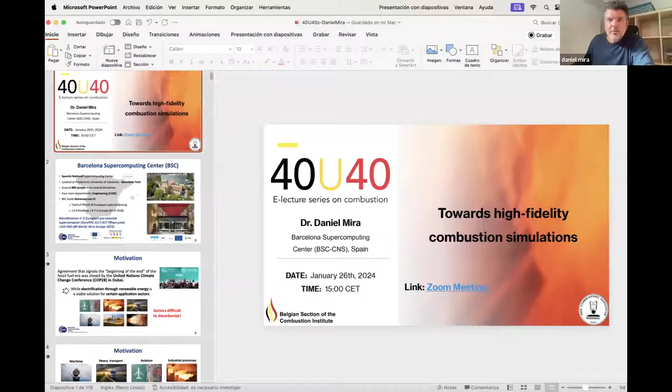As Alessandro said, I work at the Barcelona Supercomputing Center. We are located in the city of Barcelona in the northeast of Spain, and our institution hosts the supercomputer MareNostrum, which is one of the largest supercomputing facilities in Europe. Currently, we are moving from our current system, MareNostrum 4, to the new pre-exascale system, MareNostrum 5, one of three pre-exascale facilities that Europe has invested in to support science and innovation. This means our research activities are very much aligned with the simulation of combustion systems, trying to keep pace with the development of hardware architectures. So on our side, models, methods, and software are coupled together to take benefit of the current generation of supercomputers.

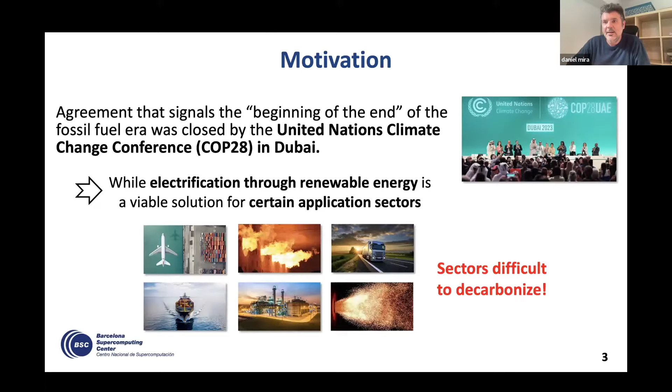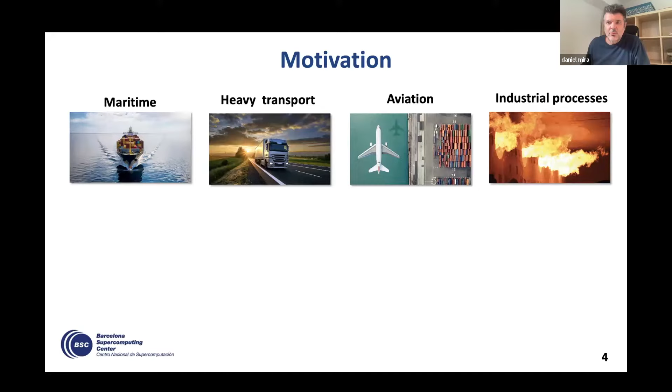If we look at these sectors more closely, we can see that in order to make them more efficient and carbon-free, we have really two main directions. The first one is to improve current combustion technologies. As you can see, engines and burners have been optimized and improved over the years. This has been demonstrated in our community, in conferences, and also by the things we can buy in shops. This requires a substantial effort, and indeed this is a direction we should take to improve our current systems. But even with radical new technologies, we can have big jumps towards reduction of emissions or fuel consumption.

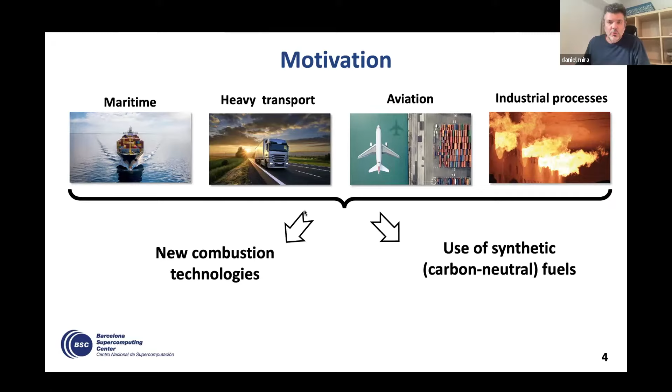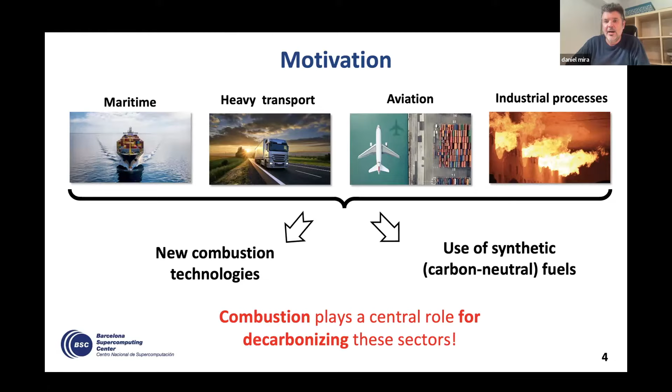But the impact is more on the long term. If we want to have impact in the short term, one alternative that is becoming quite relevant is to change the fuels. So we can retain the current combustion system, the combustion technology, but we replace the fossil fuels by alternative fuels that can be carbon neutral or not contain carbon at all, like hydrogen. With this, we are able to have a direct impact in these sectors in much shorter time. So in both strategies, combustion is at the central role, and it is the direction required for decarbonization. But if we want to understand and predict combustion, this is not an easy task, as you already might know.

So if you look at, for example, some of the pictures on the left, like some flames in furnaces, a hydrogen flame in an aeronautical combustor, or another flame of an oxy-fuel burner or a gas turbine burner, as you can see, when we go to applications closer to industrial applications, the characteristics of the flames and burners become quite complex.

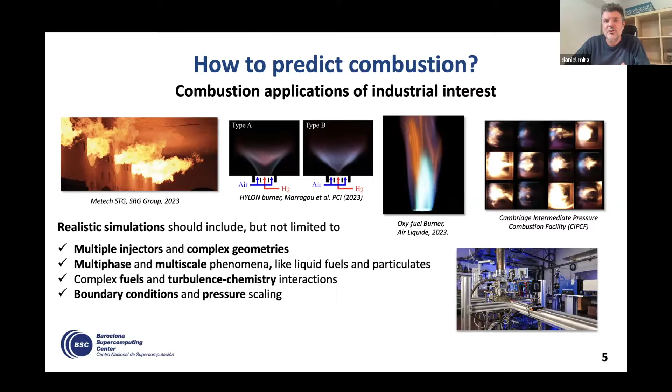Some of the aspects bringing this complexity are related to the existence of multiple injectors, complex geometries, interactions between these injectors and the walls and the environment of the system. Also, because the combustion process itself is very complex, multi-phase, multi-scale, you need a description of the possible interactions that appear in all these physical phenomena.

For all these reasons, we can ask ourselves if we are able to actually perform simulations of real systems, and if we can, how expensive these simulations are going to be.

If we think about the combustion process itself, we see that combustion is a complex process that requires the injection of fuel. In case of liquid fuels, you have to inject at high pressure. Then the fuel is injected in the chamber, then it requires atomization, so the liquid core of the fuel needs to be broken into ligaments. These ligaments need to form droplets. The droplets then evaporate, they mix with the air, and eventually combustion happens.

So you need to account for all the physics associated with all these processes, and then the problem becomes quite complex, because you have, for example, pollutants that are developed at certain scales. Then you have the heat release that is usually faster than the formation of certain pollutants. Then you need to account for turbulent chemistry interactions.

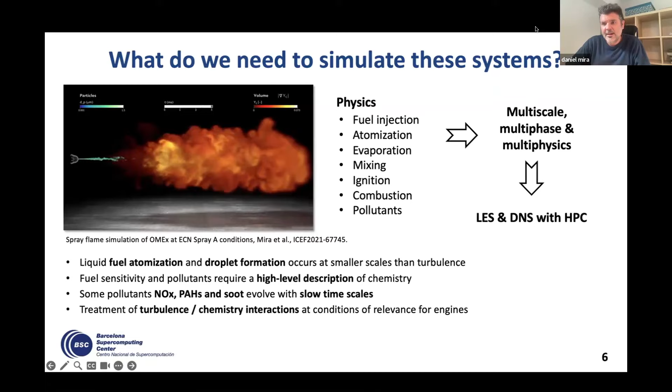So at the end, we can say that combustion is a multi-scale and a multi-physics process, and therefore it requires advanced computational techniques in order to have proper characterizations of these systems with high fidelity.

And if you require complex simulations, this usually comes with the use of high-performance computing that allows you to perform simulations in a feasible amount of time.

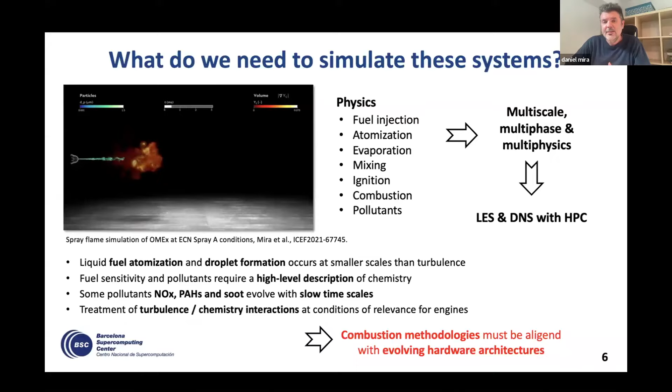With these ideas in mind, it is important to understand that combustion methodologies should be developed aligned with the supercomputing and hardware architecture, so we can take advantage of the evolution of these systems and the computational power that they bring for our community.

So if we are trying to understand how we can perform these simulations or how our methodologies should be based, at the end, it's really a matter of scales. If we think about spatial scales, for example, these are just some numbers that will give you some estimates.

For example, we need to deal with systems that have a fuel injector with dimensions in the order of millimeters, when the combustion chamber is in the order of centimeters to meters. The length of the combustion chambers could be very long, in the order of meters.

But then we also have aspects related to the flow scales, like the flame thickness or the integral length scale, that are associated with very small scales. So we need to deal with small scales that occur in very large volumes, which at the end introduces some complexities and requirements of computational cost.

If we do a similar analysis about the temporal scales, at the end, it's about the same. We need to, if we are interested in the acoustics, be able to recover and describe the time scales required for the acoustics, which could be larger than, for example, the formation of radicals and also emissions.

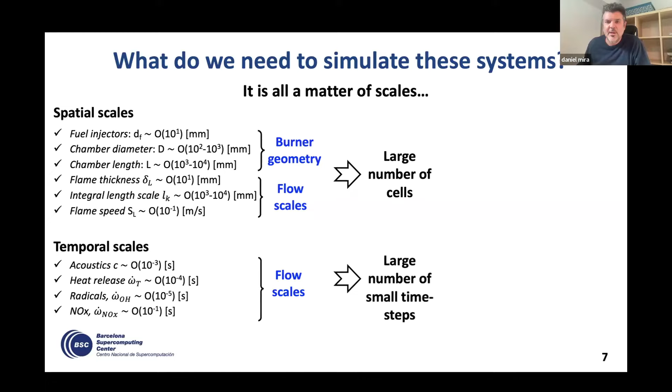So if we think about the requirements of the spatial scales, we are going to end up having a lot of cells in our computational domain, because we need to predict the distribution of the species and all these processes in these big computational domains. But considering the scales of the problem we're solving, we're going to require a large number of small time steps if we want to solve all the processes in, let's say, an explicit manner.

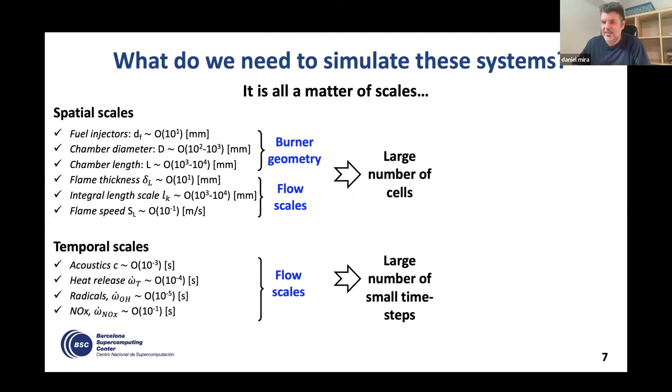So at the end, if we think about real problems, we can assume that doing DNS can be prohibitive, and these problems are more suitable to use RANS. Now the question is, with this increase in computing power and computational capabilities, is it possible to push LES towards this type of application? And indeed, if we want to go in this direction, we need high-performance computing, but this is not going to be enough.

We need models. So if we go to LES, we need computational power, but also we need some models. With this motivation, I want to give you a little bit of orders of magnitude about how costly these simulations can be.

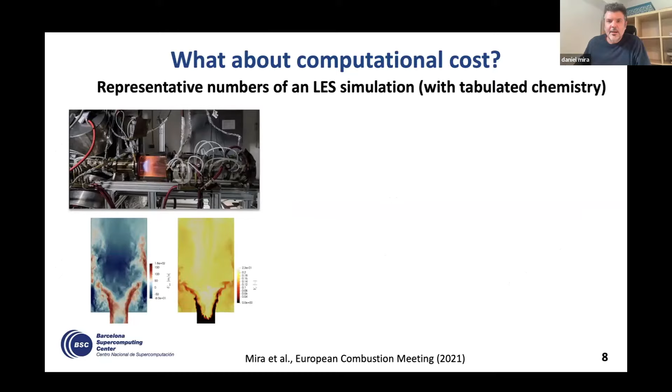For example, if we take one of the simulations we conducted about a hydrogen combustor that was experimentally characterized at the Technical University of Berlin, for this flow condition we perform an LES of hydrogen-air at atmospheric conditions. For a simulation of 30 milliseconds, considering 250 million cells, we require in the order of 100 hours using 6,400 CPUs.

If we want to do a simulation overnight, like I work in my office today, prepare my model, submit my simulation before I go home, and I'd like tomorrow morning when I get back to the office to look at the results, I would require in the order of 60,000 CPUs to get the same result. 60,000 CPUs is something currently available in supercomputers - they even have more cores than that.

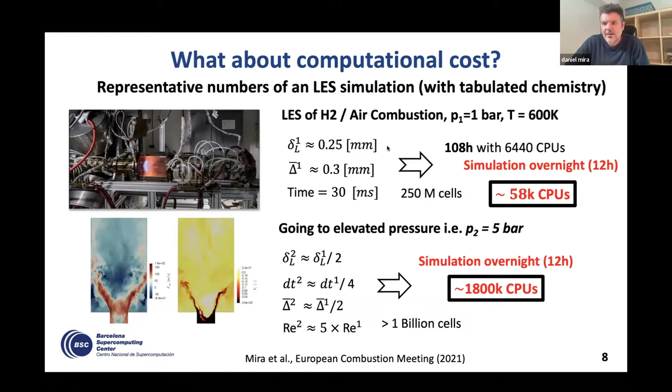But if we want something more realistic, just an increment in pressure in the order of 5 bars - a factor of 5 in pressure - then for a similar simulation we could roughly estimate it would require in the order of 1 billion cells, and in the order of 2 million CPUs, which is definitely not available in current supercomputers across the world.

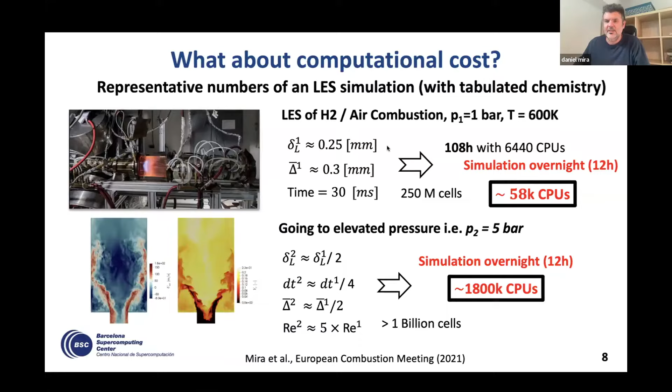So now the question is how we can make our simulations more efficient, or how we can improve the software we develop, so we can try to reduce the cost associated with this simulation. Let's try to talk a little bit about this.

If we want to understand how expensive numerical simulations are, this is really a very complex task, because it depends on many things. The first is whether you are going to use RANS, LES, or DNS - depending on the technique you use to solve the fluid problems, the cost changes. It also depends on the discretization strategy you use - finite difference, finite volume, high order methods, for example. It also depends on the turbulent combustion model you want to use for solving your problem, if you have a model. If you don't have a model, of course, it's going to be even more expensive.

Then there are other aspects that are usually less discussed or less considered, which is about the algorithms and the parallelization in your code in order to solve the problem. If your code is serial, of course you are going to take a certain time, but if your code is parallel, and you can double the resources used to compute the simulation, then the cost of the simulation will be reduced by half, or at least the time to solution will be reduced by half.

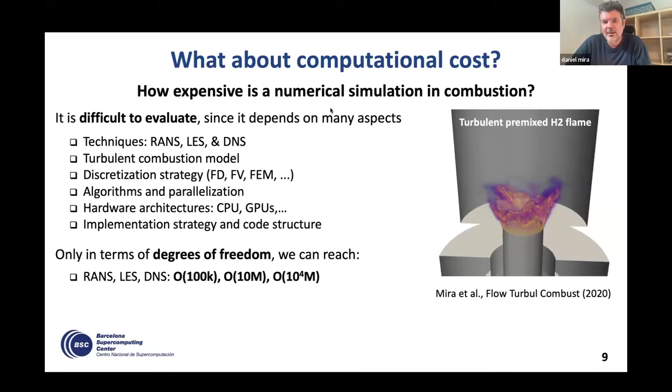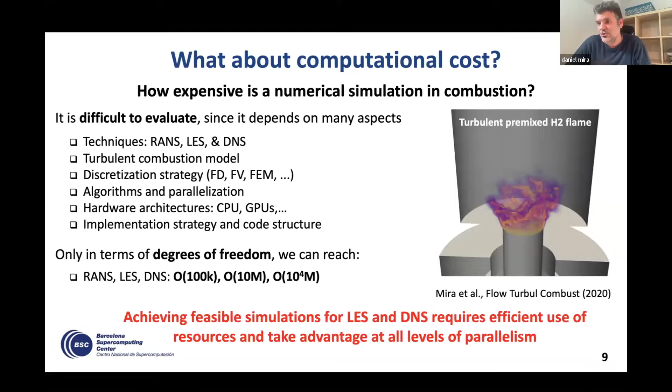Just to consider, in terms of degrees of freedom, when we go from RANS, LES, and DNS, what you can see is that the jump from RANS to LES is a very big jump, not only in terms of degrees of freedom, but also in terms of the computing requirement for an unsteady simulation. There is also a big jump when you go from LES to DNS. For all these reasons, if you need to conduct LES or DNS simulations, it is very important that your code makes efficient use of the resources available in the supercomputer.

So if we try to understand where this cost is coming from, because I've been saying a lot of things about physics, about computational requirements - where is it really that these combustion simulations are so expensive? Where does the problem really come from?

So if we think about the conservation equations that we need to describe the flow or the problem under consideration, then we have to solve the equation for continuity, momentum, chemical species, and energy, and the system is closed by the equation of state. So at the end, more or less, you end up solving these equations that doesn't seem to be very problematic, but they become very, very problematic.

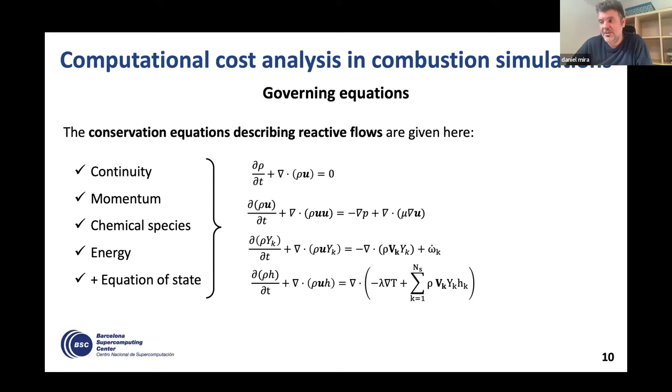And not only the Navier-Stokes are problematic, but also the equations related to the chemistry and combustion. In particular, for combustion simulations, the equation for the conservation of a species is usually the most demanding part, mainly for two main reasons. The first one is because, depending on the fuel and depending on the detail of the chemistry that you need for your problem, you might end up solving a very large number of transport equations.

So, for example, if to describe the fuel oxidation you need 20 species, you will need to transport 20 equations that will go on top of momentum, continuity, and energy.

And the other aspect that is important is that this equation for chemical species has a source term which is non-linear, and depending on the characteristics of the oxidation process, these chemical source terms can be very stiff, and it could require very demanding or very costly calculations.

So let's try to look at this equation more closely. This is very fundamental, but I would like to just revise it. So this equation at the end is composed of 4 terms.

So we have the temporal term that is related to the time marching of the simulation. So, how is the concentration, or in this case the mass fraction of a species K, evolving in time. Then we have another term that is related to advection, how this species is moving with the flow.

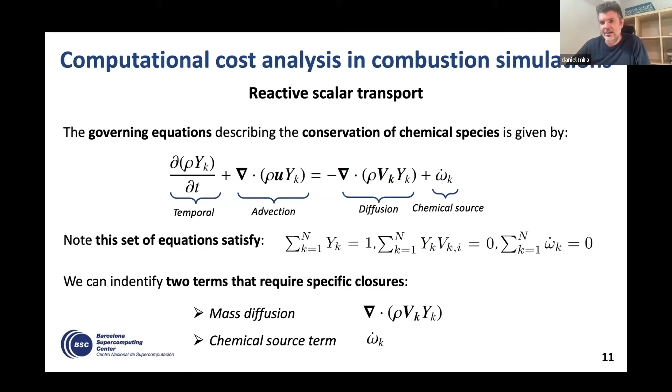And of course, the chemical source term, as I already introduced, can be stiff, and you might require to use ordinary differential equation solvers for this.

So considering this equation, we can try to understand where the cost is coming from, and what are the aspects that can introduce a penalty in the calculation. The first one is what we call the assembly of the partial differential equation. The assembly means basically the computation of the different terms: the advection, the diffusion, and the source term.

So at the end, the number of degrees of freedom that you are going to have in your problem is the number of species that you have in your reaction mechanism times the number of cells that you have in your computational domain. So for each of these degrees of freedom, you will have to evaluate convection, diffusion, and source term.

The other element that introduces cost and complexity in the calculation is the chemical source terms, as we already said. If it's stiff, this could require some iterations and some complex algorithms to extract the values. If it's non-stiff, then you can get away with more simple, explicit or semi-explicit methods.

And finally, something that is also less discussed in the literature is what we call the load imbalance. Let me explain a little bit about this, because this can become quite problematic in combustion simulations. For instance, if you have a computational domain like the one described here, these small cells are trying to represent the cells of the simulation, and these dashed lines are representing the subdomains. Then you can assume that you will have an MPI thread that will solve the problem in each of these subdomains.

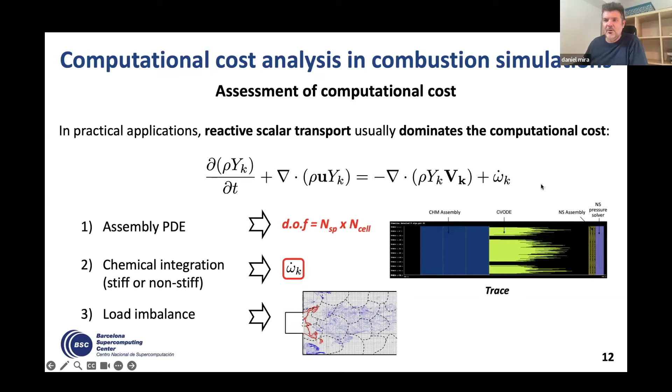So as you can see, the computation could have finished somewhere here in the middle, but because there are some MPIs performing work, we need to wait for them to continue. This can be a very problematic issue, especially in combustion when the chemical source term is very stiff.

So another problem associated with the chemical source term - it's a troublemaker in combustion, in fact. It not only brings a cost, but it means that when we want to go to LES and filter this equation in space, the problem becomes how are you going to perform the filtering of this term? And this is not a simple problem.

Depending on how you filter this term, or how you would like to have an equation for chemistry based on filtered quantities, we end up with a quite wide scope of different turbulent combustion models. I have listed them here by their acronyms - you can find them in the literature, they will come up with these names very easily. As you can see, there are plenty of turbulent combustion models in the literature trying to provide an efficient method.

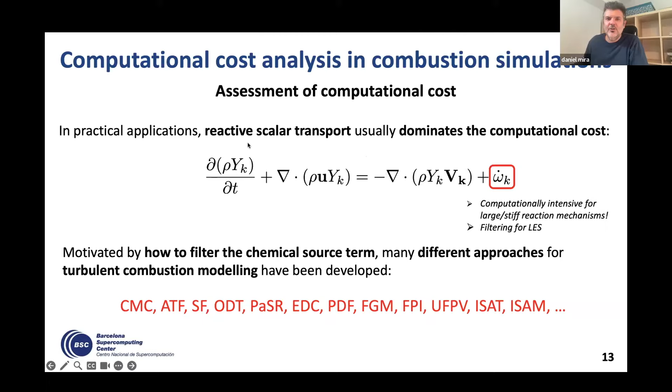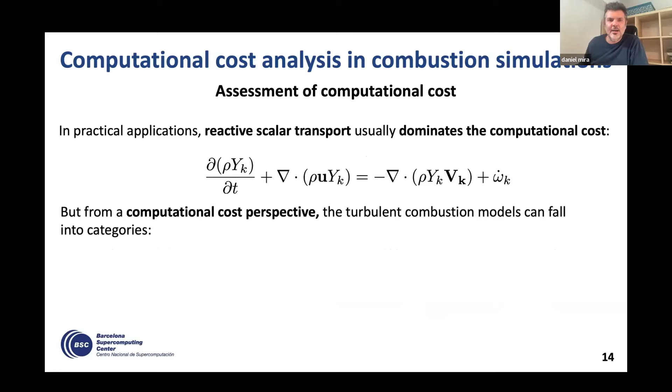Either to filter this term, or to consider an equivalent equation corresponding to the filtered quantities. But I like, at least for the topic of this afternoon, to discuss turbulent combustion models from a computational cost perspective - models based on the Arrhenius law, computing the species and chemical source terms. We put them in the category of finite rate chemistry.

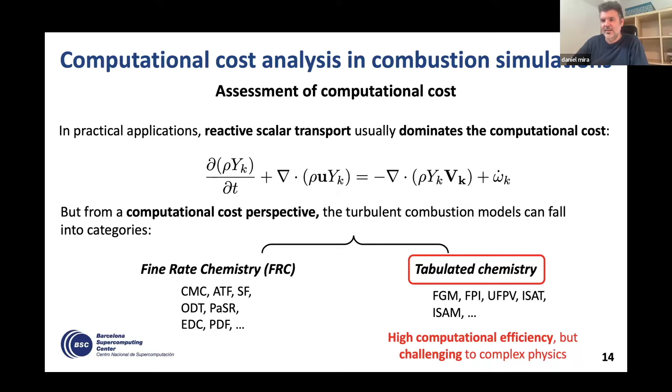On the other side, there are other methods based on tabulated chemistry, which try to reduce the computational cost by tabulating some terms that can be computed on the fly or pre-computed before the simulation starts. For today's presentation, I will focus more on the tabulated chemistry methods because they have good potential to deal with large-scale simulations and industrial applications, since they are computationally very efficient. However, they also bring problems on how you can adapt these models to represent complex physics.

If we step into tabulated chemistry methods, I will try to give a brief presentation of what these methods are about. And then, of course, you can dig more into the references I put here, or in the literature, for additional details.

For example, considering a turbulent flame where you have your fresh gases here and your burned gases there, so there is a reacting layer that goes from unreacted to fully reacted mixture.

And then if we assume that this flame length can be smaller than the Kolmogorov length scale, then we could also assume that the turbulence cannot distort the flame structure in this case.

And therefore, we can assume that the fluxes that go perpendicular to the normal of the reacting layer can be smaller or less significant than what's happening along the normal direction of the flame.

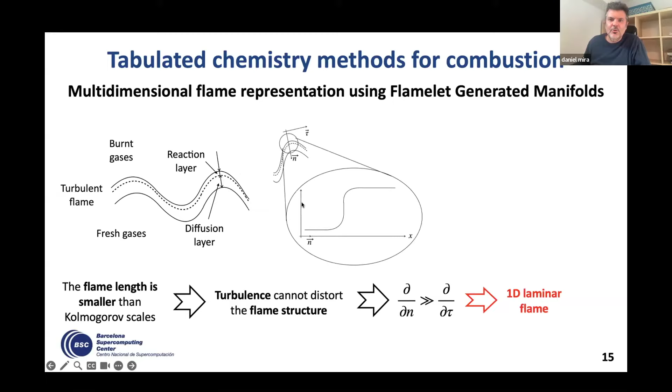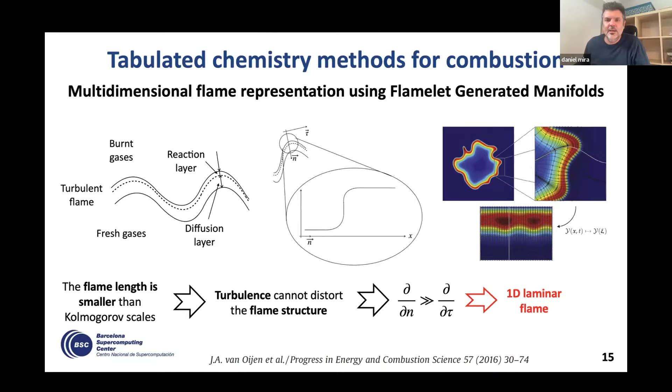We can actually assume that our turbulent flame can be composed by a composition of 1D laminar flames, and you can get a representation as it was done in this nice picture from the paper by Professor Van Oijen about the flamelet-generated manifolds method, where your flame, even though it's 2D in this case, or it could be 3D, is locally one-dimensional along the normal isosurface of the flame front.

So if we make this representation, then the solution of the problem can be quite nice, because you can start from the full conservation equations that we presented before.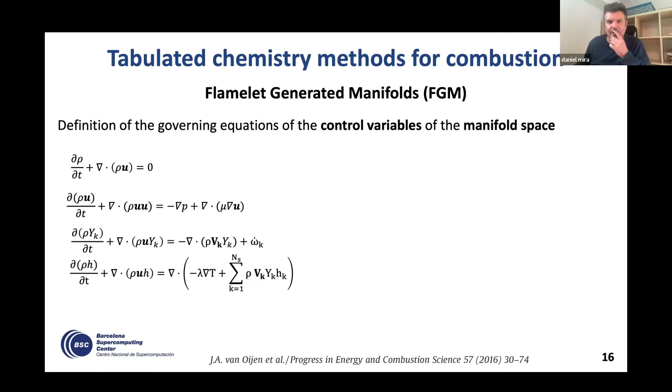And then if we consider a gas with NS number of species, you can try to go from a situation where you will have to solve NS minus 1 equations to a situation where, if we identify variables that can represent the space of solution, and if this number of variables is much smaller than the number of species, then we can reduce the cost of the simulation, because we don't need to transport all the equations, but just a certain number of variables that represent the composition space.

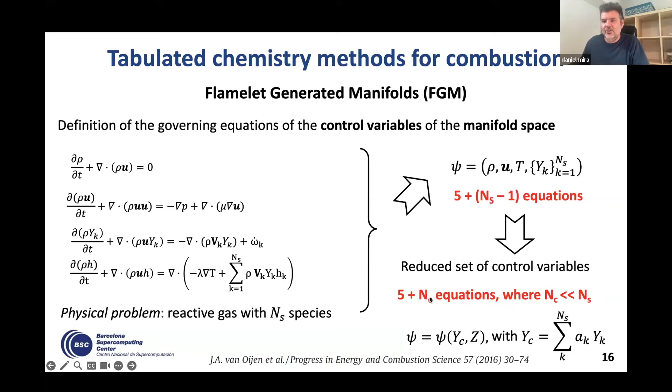This is usually considered in the frame of the FGM. We use the mixture fraction and a progress variable, but you could have even more controlling variables. So we can go from a system of NS number of equations to a system where we have NC, or number of control variables, number of equations, which is actually quite nice.

So how do we build this model? If we consider this representation of control variables, then the database or the manifold where the information is stored can depend on the configuration that you use.

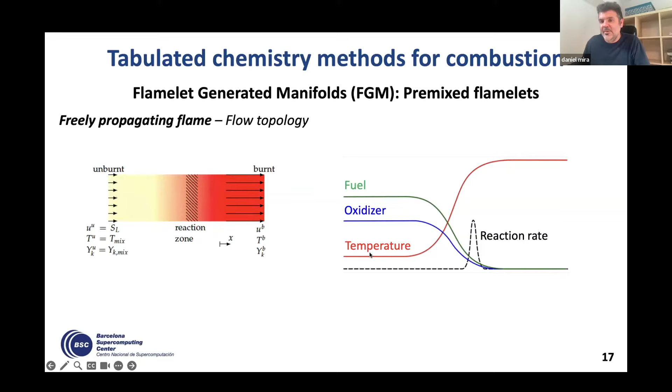Usually, for FGM, we have two main configurations. We either use the premixed flame configuration, for example, that I believe you're all familiar with. We have unburned conditions here, fully burned conditions there, and then this distribution of fuel, oxidizer, and temperature. This is a 1D configuration, and we try to represent the 3D flame by a composition of one-dimensional flames like the ones described here.

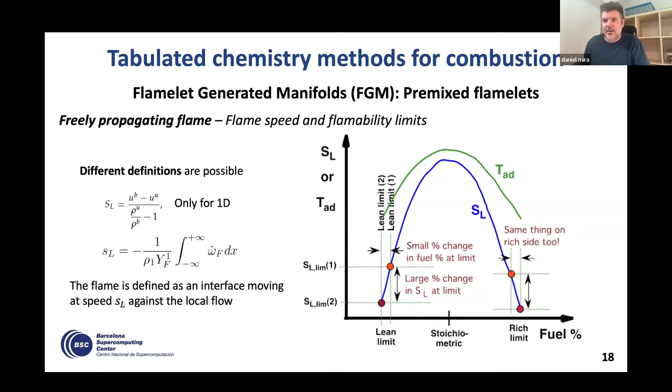If we consider the one-dimensional premixed flames along the flammability range as described here, we have the lean limit, we have the rich limit, and then we generate one flamelet solution for each equivalence ratio. Then we can build a database based on premixed flamelets very easily and apply this in our FGM method.

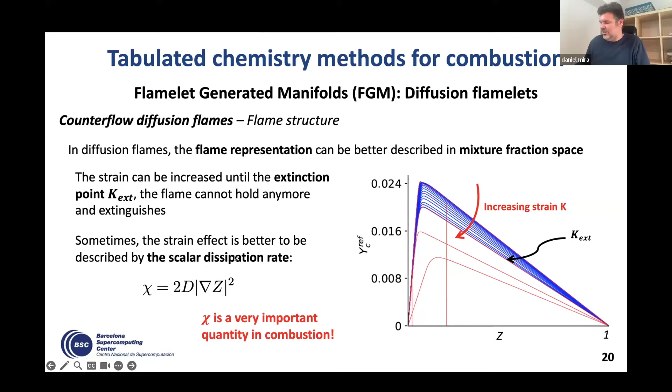So at the end, you can end up with very complex flamelet architectures for trying to predict more complex physics.

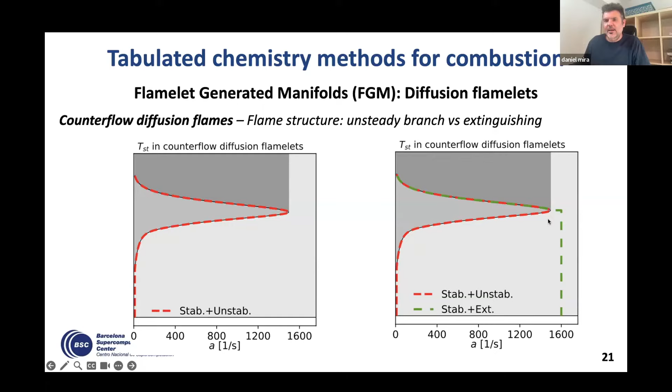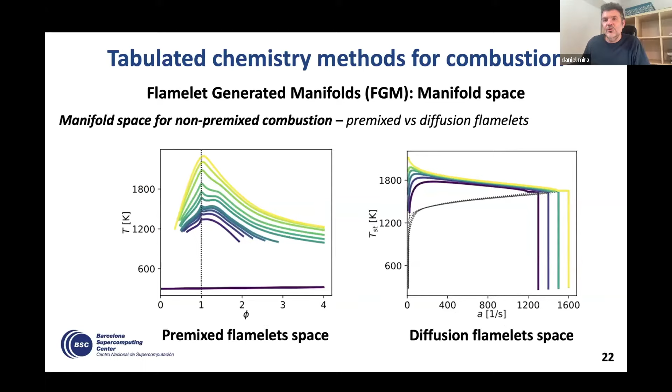So at the end, whether you define your manifold space using premix flamelets or diffusion flamelets, this is something that will affect your calculations. And this is something we're going to try to see now with some examples.

After you define the structure of the flamelet database, which will impact your calculations, you also need to account for turbulent chemistry interactions. In the context of tabulated chemistry methods, there are fundamentally three main possibilities. The first is presumed PDF methods, basically assuming that the effect of turbulence on the flow will integrate into the source term, and the tabulated quantities follow a certain distribution. Then you can get your laminar database and integrate it with this particular function.

We usually use beta or delta functions. Another possibility is to artificially thicken the flame, in this case to thicken the progress variable equation, and then you can account for these turbulent chemistry interactions. The third method is F-TACLES, which is based on filtering the flamelet solutions and recovering the correct flame based on the filter size in the mesh.

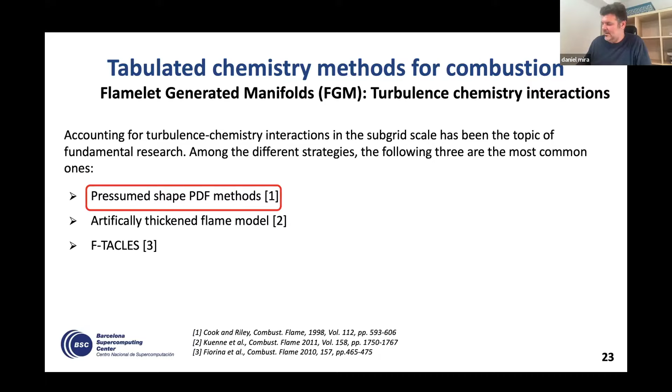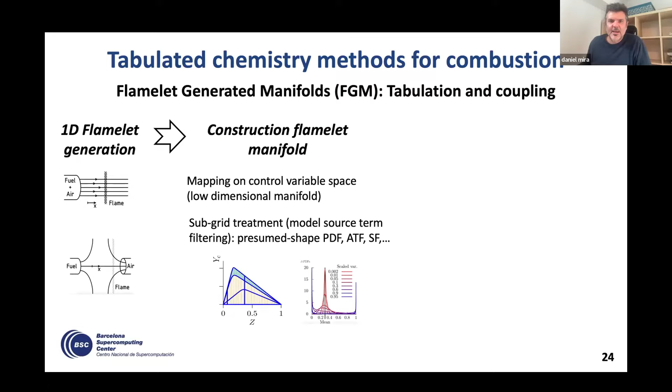Just to get an idea of the workflow: when we go to tabulate chemistry methods, we first define the flamelet generation, so we define the configuration that we will use to generate the database. Then we construct a flamelet manifold, doing the coordinate transformation from physical space to composition space. And then we consider sub-grid treatment with filtering, presumed shape PDF, and couple this with the CFD.

This approach is quite interesting because at the end, by just transporting a reduced number of equations, you are able to recover all the properties that you need from the flame. You can have access to compositions of all the species, even radicals, reaction rates, and properties. So this method is quite interesting, and you don't need to compute anything at runtime—you just access the database and recover the properties you need. However, using these methods to predict unsteady and complex physics introduces some complexities.

Some of these complexities include how to deal with multi-regime phenomena—what happens in situations where you have a premix front interacting with a diffusion flame, when you have stratification, or auto-ignition, for example. Then there's the issue of pollutants: if you want to incorporate a slow species with fast species in your manifold, how can you accomplish this if you have a single progress variable? How can you include detailed transport phenomena, for example for hydrogen flames, or how can you retrieve information from your database faster?

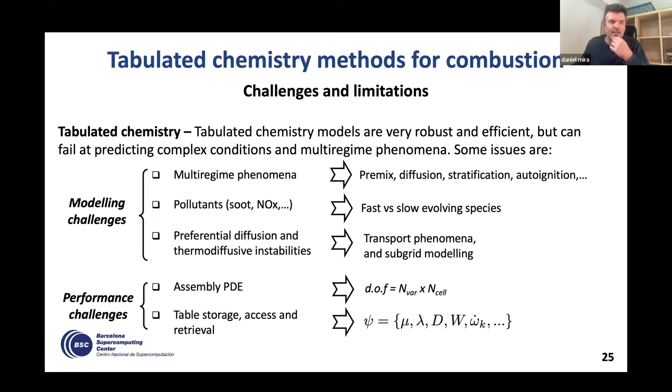We will try to show you how these methodologies are used for certain problems of practical interest, and I will touch briefly, not in too much detail, on how you can incorporate soot, for example, in the flamelet database, and apply this to turbulent flames, obtaining quite good accuracy in the calculation while keeping reduced computational cost.

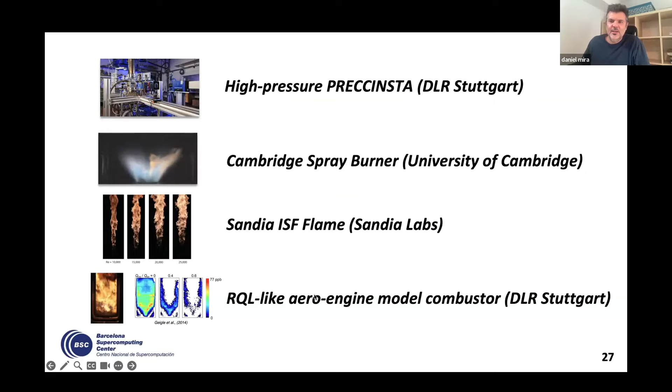So for the applications, I will focus mainly on four cases: a hydrogen-enriched natural gas flame in a swirl burner from DLR Stuttgart, a spray flame, and two sooting flames—the Sandia ISF flame and a DLR aero engine model combustor at pressurized conditions.

Okay, so all the applications that we do, we use our code called Alya. It's a multi-physics code developed in our department for many years, and it has interesting capabilities in terms of computational performance and also in terms of physics, not only for fluid mechanics but also for structural mechanics, nuclear applications, electrochemistry, electromechanical models, and all types of coupled phenomena.

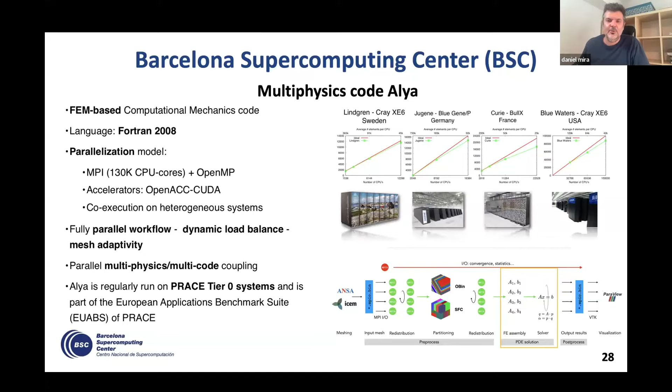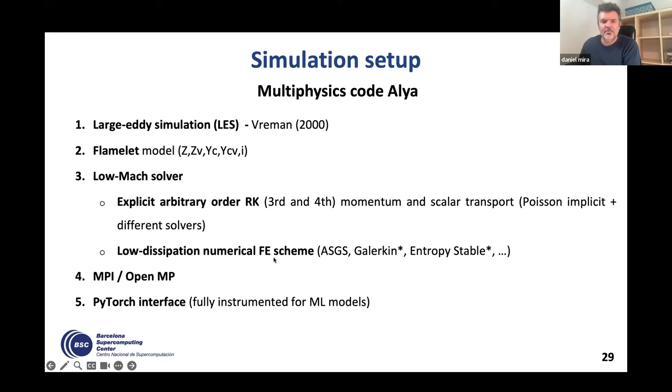So for the applications I will present now, I will use the flamelet method based on transporting mixture fraction, mixture fraction variance, progress variable and progress variable variance, and including normalized enthalpy to account for heat loss. It's all in the context of LES, and our numerics use arbitrary order Runge-Kutta, mainly order 3, and low dissipation numerical schemes for the low Mach number and also for the reactive scalar transport. The code is parallelized with MPI and OpenMP, and it has been instrumented also to couple with machine learning models.

Okay, so for the PRECCINSTA case I will try to go a little bit quick now. The motivation for this case is that there were some experiments conducted at DLR, and they tested the influence of hydrogen in natural gas, which exhibits different flame characteristics due to the addition of hydrogen. We wanted to understand if these flamelet methods were able to predict the dynamics of the flames, and to try to see how accurate this approach was on predicting this physics.

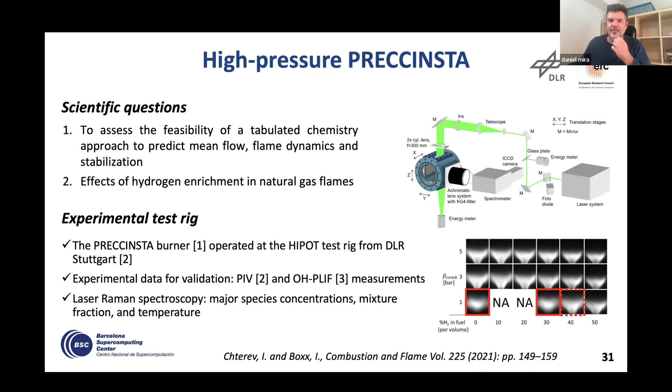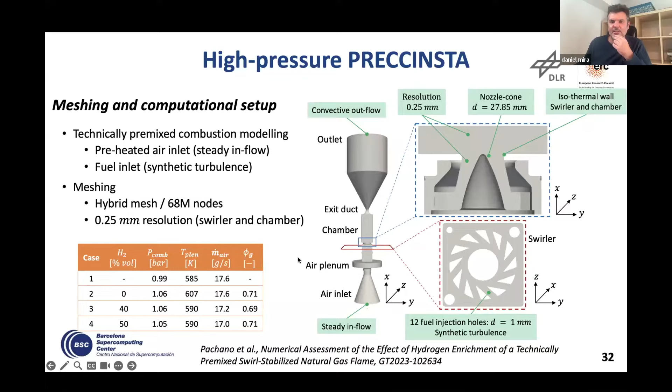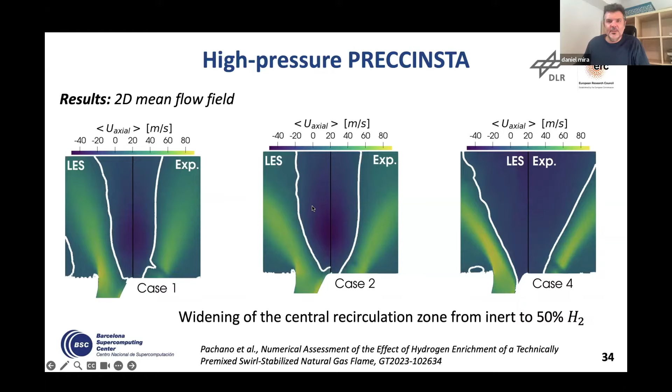Then we compare the cases - this is the non-reacting case with the case with pure natural gas and 50% hydrogen. What we can see is that as the hydrogen is included, the recirculation is widened, and the comparison with the experiments is qualitatively well captured. Here you can see a more quantitative assessment of the flow field by comparing the experiments with PIV against the numerical simulations, and the agreement is fairly good for all the operating conditions.

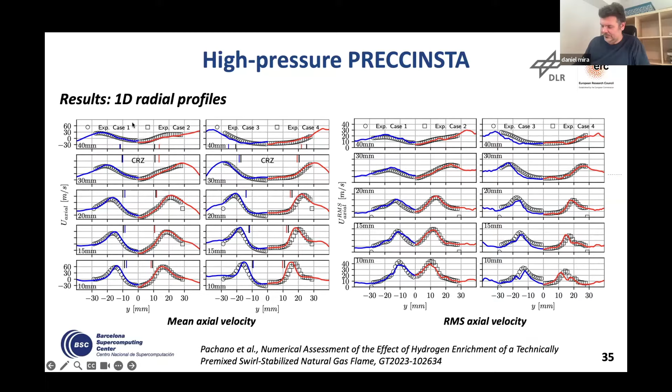Okay, this is the case with the inert case, the natural gas, and the hydrogen. This is more interesting, as this is usually where most differences come from, along the center line. What you can see is that when you go from inert to reacting, the recirculation becomes stronger in this case. In this case the flame is detached, and then you create this recirculation. In the case with hydrogen, the flame is attached, and the recirculation is lower, but it also has a quite a longer recirculation zone.

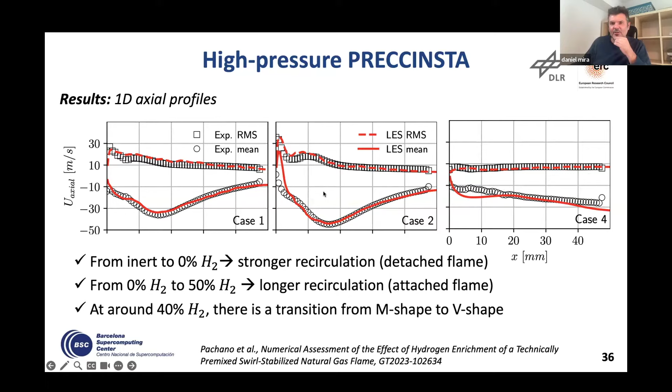So you can see here already that the dynamics between case 2 and case 4 are going to be quite different. The case with pure natural gas forms this type of flame, which is an M shape. The case with 40% shows the flame getting attached, and the case with 50%, the flame is actually fully attached.

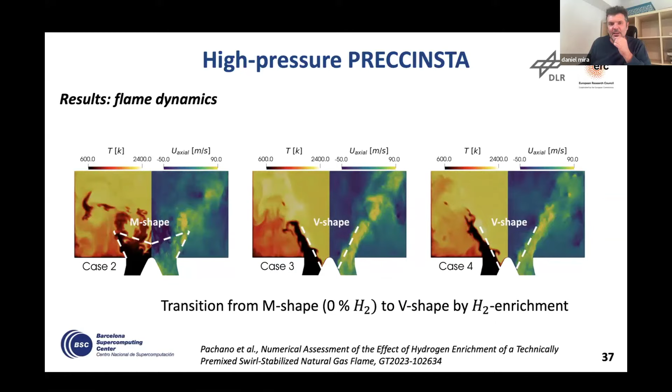So the tabulated chemistry model was able to predict the transition from the M shape to V shape by the addition of hydrogen. Another interesting case is that we can use tabulated chemistry, which also brings quite a lot of complexities, is about spray flames.

This case is a Cambridge spray burner from Professor Mastorakos at the University of Cambridge. This burner is characterized by swirling air that is coming from here. The air is coming from a plenum and then goes to this swirler, and then it gets into the combustion chamber. In this case, the fuel is injected through a spray, like a pressure atomizer. The air is mixing with the fuel, and then the flame is formed.

So in this case, this is a configuration that tries to mimic realistic gas turbine conditions, but in a more controlled environment, so measurements can be taken and validation can be performed.

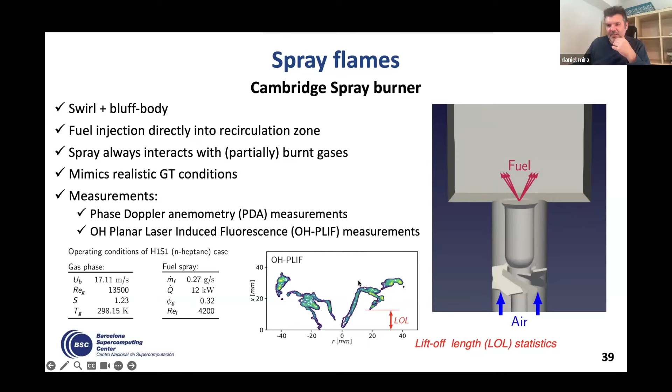One of the main characteristics and limitations of flamelet models is the ability to reproduce lift-off lengths, which is usually associated to unsteady phenomena. This experimental database has information about this, including OH PLIF, and we can use this to assess the predictivity of the tabulated methods for this particular phenomenon.

As always, we consider two different meshes, a coarse mesh and a fine mesh. In this case, we have the resolution in the region of interest from 1 millimeter to 0.5 millimeters, and what you can see here is more or less the dynamics of the flame.

So you can see the location of the spray is here. The fuel particles are interacting and crossing the flame front and interacting with the layer. And then you get all these dynamics of the flame that are shown here.

I think it might be seen more clearly in these plots here. What you can see, for example by looking at the OH, is how the flame tends to get detached from the bluff body here. And then this has certain dynamics that we try to evaluate.

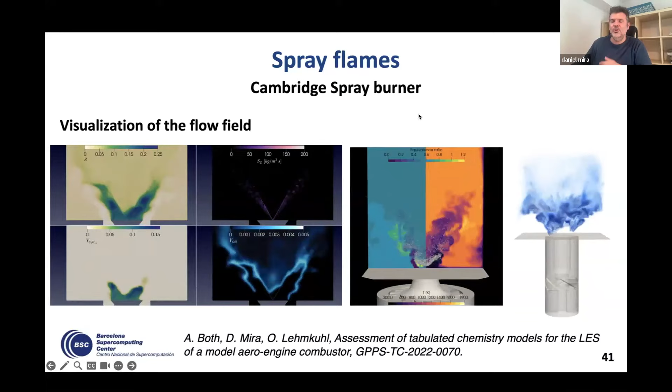So first, of course, when we look at spray flames, you always need to start by comparing and looking at the velocity of the particles and the diameter of the particles.

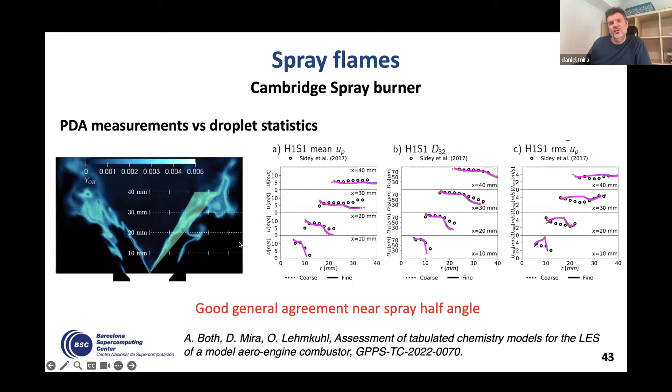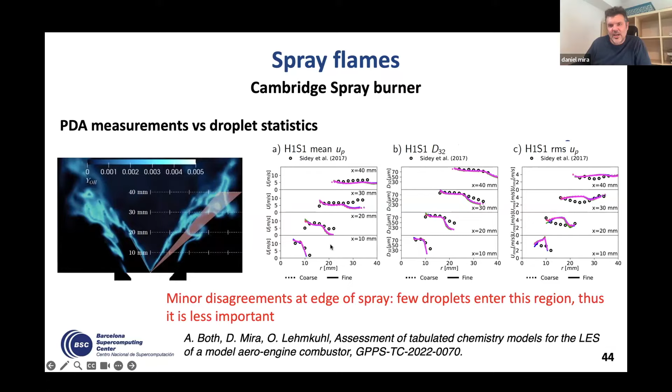We compare here different meshes, and the results are in quite good agreement with experiments for the particle velocities, mean diameters, and even fluctuations of the velocities. In the inner region of the spray, the results are quite acceptable. At the edge of the spray, the comparison is not as good, but because there are fewer droplets, this part is a little less relevant. Overall, the agreement was good.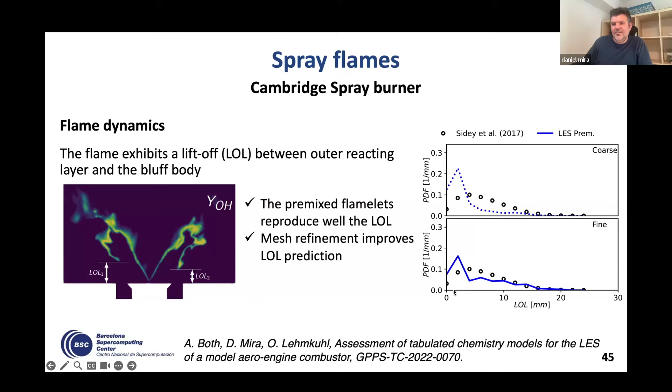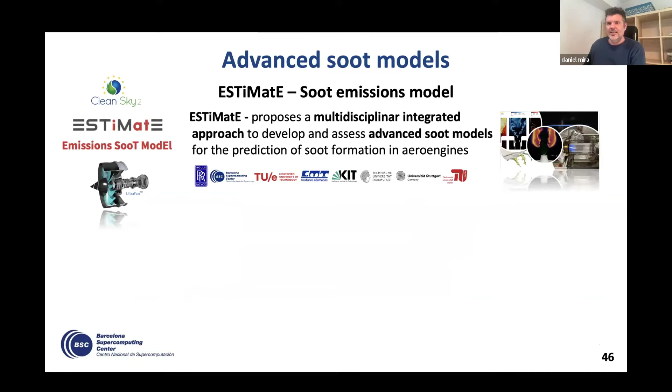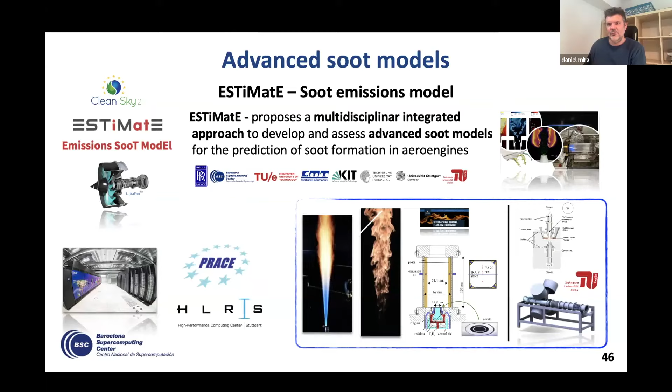Okay, so now I will rapidly go into soot formation. We were working over the last 4 years in a European project called ESTiMate about developing advanced soot models for large eddy simulations that do not include only the soot mass fraction, but are also able to provide a particle size distribution. It was a collaborative project, quite interesting, and we developed different methodologies, experiments, reaction mechanisms, and it was quite successful in advancing the knowledge of soot formation and creating models for LES.

So in the context of the project, we worked with two main concepts: the method of moments, mainly addressed by the Technical University of Darmstadt, and we were working with Professor Van Oijen at the Technical University of Eindhoven in the context of the discrete sectional model. In this case, we were developing and evaluating a methodology to incorporate the soot model into the FGM table. What was possible to obtain, and I will show you some results, is a methodology that couples the FGM chemistry with the discrete sectional method, and we tabulate the source terms related to soot into the database.

So in the end, both chemistry and soot only require the use of transport equations, but not computation of source terms in the CFD. All the calculation of the source terms were computed directly in the flamelets, and then during runtime these properties were recovered. For this, we look at the Sandia ISF flame.

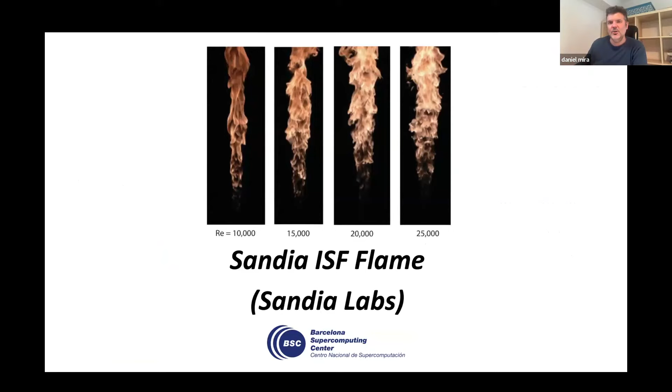This was conducted mainly by a PhD student at the time, Abhijit Kalbhor from Eindhoven, who did an excellent job developing and applying this model to different cases.

In this case, this is a very well-known Sandia ISF flame. It's a jet flame with a pilot coming from the surrounding, and the hot gases from the pilot interact with the fuel, developing this jet flame that you can see here, which has a lot of soot.

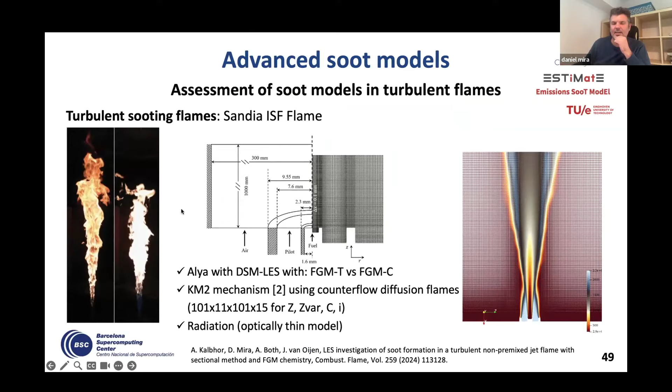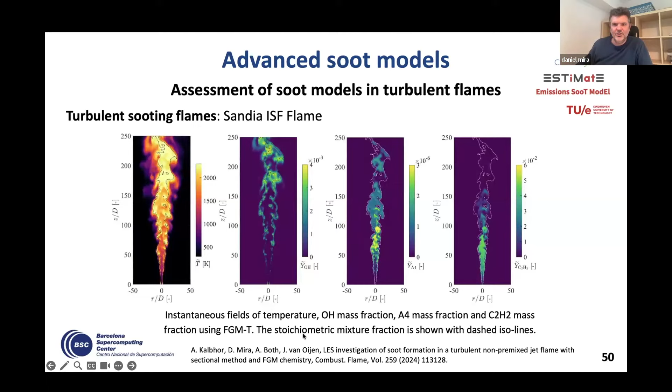You can see some instantaneous plots of the shape of the flame. In general, the agreement with the experiments about the flame was good. You can look at more details about this in the publication. Here you can see the dynamics of the flame.

You can see exactly where the soot is formed. The soot starts forming mainly in this region, which has the highest soot concentration, and is then developed, transported, and further oxidized downstream.

Here we compare the intermittency, comparing the FGM with a method that computes the source terms at runtime with a method that tabulates the sources at runtime. What you can see is that the case with computed source terms is more accurate at predicting the starting of the formation of the soot, but in the region where the soot exists, the two methods behave in a similar way.

Here you can see conditional means for the volume fraction over scatter plots between the computed source term and the tabulated source term approach. What you can see is that the tabulated approach is able to recover fairly well the characteristics of the case with computed source terms.

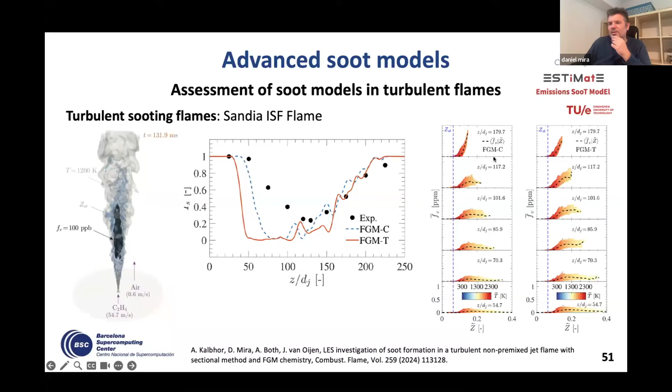Here you can see a final validation in terms of the mean soot volume fraction at different positions of the flame, and here you can see the general plot of the soot across the center line.

The first time you see these things, you might think the correlation is not very good. Indeed, it's not very good, but this is more or less what computational models are able to predict in this case. I would say this is more or less state-of-the-art results for this flame.

The interesting thing is that with this tabulated approach, we are able to reduce the cost of the calculation by a factor of 7, while obtaining more or less similar results.

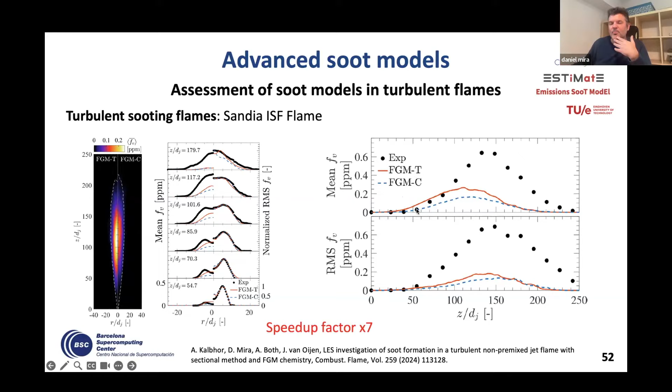With an effort to further improve and reduce the cost of soot formation with tabulated chemistry, a collaboration with Professor Van Oijen and Abhijit brought us to the idea that if we have all the soot already included in the flamelet, would it be possible to do some clustering of the sections so we can avoid transporting all the sections and recovering the source terms for each individually.

So instead of transporting 40, 50, or 60 sections, you can cluster these sections and only transport the cluster sections. This gives a reduction in the number of equations you need to transport by a factor of 10.

Because the distribution of soot is already given from the flamelet, during runtime you can recover the soot source terms and recover the particle size distributions.

With this idea, we were able to reduce the computational cost by a factor of 7 compared to the method only tabulating the source terms but transporting all the species.

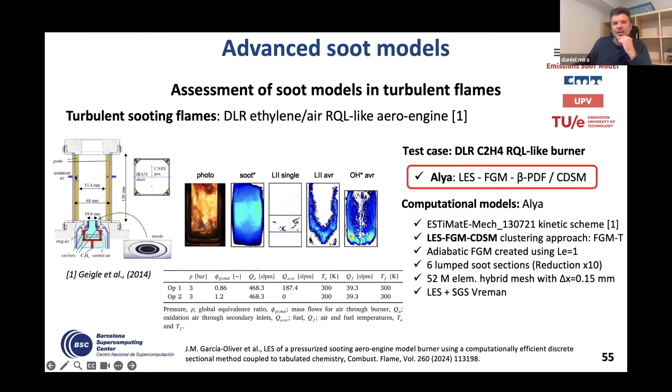And then doing something similar for the temperature, we found it was in good agreement with experiments, which validated the combustion approach based on FGM for this problem. We use diffusion flamelets in this, and these results confirm that this approach was suitable for this problem.

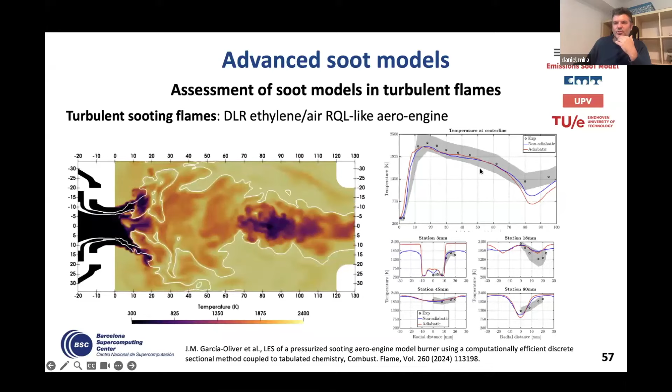So here, more interestingly, we can see where the soot is formed. On the left you can see the precursors for soot, in this case pyrene, where the pyrene is formed in this part. And more interestingly, you can see the soot volume fraction, where the soot is mainly formed in this part and then is transported downstream.

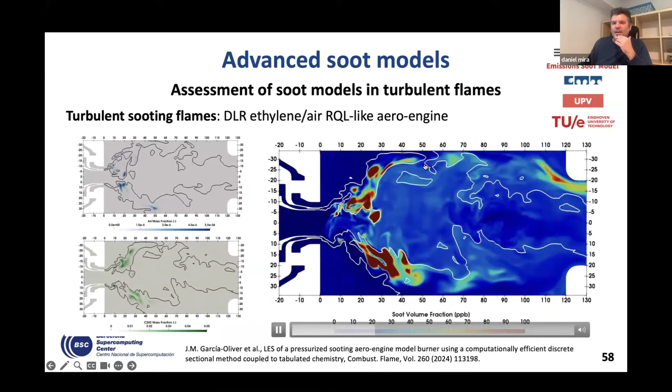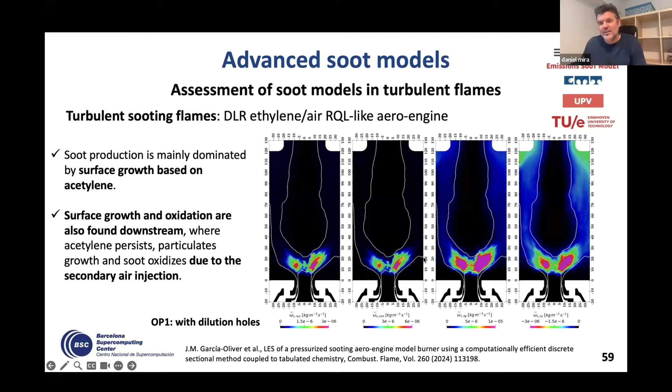What you can see is that the soot is mainly produced based on acetylene in this case, and then the term that really dominates the formation of soot is the surface growth. Here we look at different soot subprocesses for the formation of soot, and you will find a lot of details of the analysis of this flame in the literature. So I just wanted to point this out to you.

So with this, brings me to the conclusion. If we are interested in, or targeting, simulations for industrial applications, it is important to take into account the physical models, the numerical methods, and the high-performance computing algorithms, and the hardware where we run our simulations.

We still have many challenges ahead related mainly to decarbonization, with new fuels and emissions, and if we want to develop methodologies for this, we need to account for challenges related to multi-regime or preferential diffusion. These are topics I didn't cover today because of the lack of time.

And to just conclude, it is important when you do LES and DNS to not let your code become old, and you need to always push new techniques and develop code that can run on new architectures, because there is always a lot of potential and a lot of computational power coming from these systems.